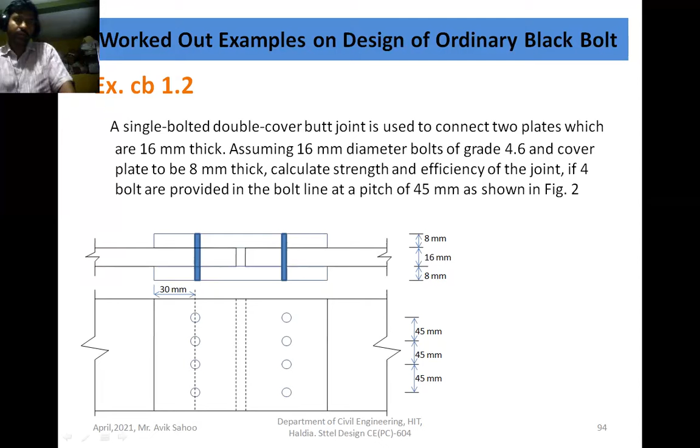A single bolted double cover butt joint is used to connect two plates which are 16 thick. Butt joints are used when the members are joined end to end. In a butt joint, cover plates are used—here two cover plates are used, having thickness 8. This is a bolted connection, and the bolt specifications are given: the diameter of the bolt is 16, the grade is 4.6.

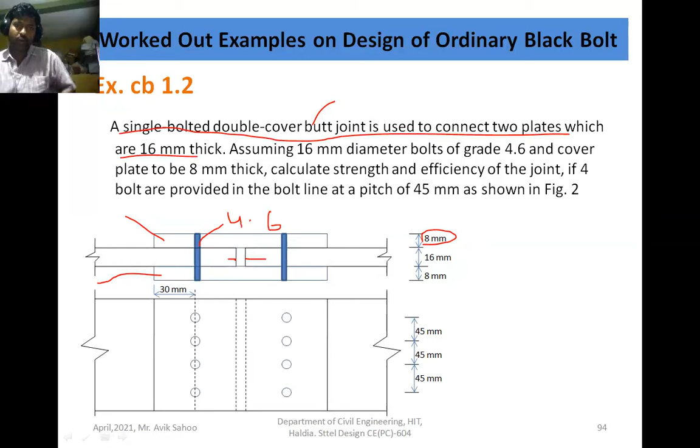If 4 bolts are provided in the bolt line at a pitch of 45, here the 4 bolts are used, and all the bolts are placed at equidistance, so the pitches are equal. The end distance is also given, that is 30. So what you have to find out: you need to find out the strength and efficiency of the joint.

In bolted connection we mainly find out shearing strength and bearing strength, and the minimum is considered as the design strength of the joint. So here the strength you have to calculate, and also you have to find out the efficiency of the joint. Additional calculation is required, meaning you have to find out the tensile capacity of the plate using the gross area and net area.

The bolt will be in double shear because here double cover plates are used to join the members. So that's why the bolt has double shear, because two shear planes are developed—this is one shear plane, this is another shear plane. So you have to find out the double shear strength of the bolt. Due to these shear forces, this member and this member try to slide one over another. So here there are two shear planes.

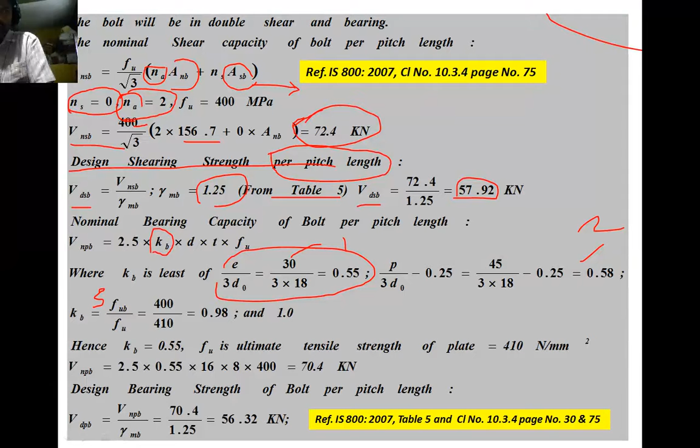We compute kb using the following expression, checking four values and the minimum is provided. This is the first value, second, third - the ratio of ultimate tensile strength of the bolt to ultimate strength of plate - 0.98, and 1. So these are 4 values, and the smaller value is adopted. So kb is 0.55.

Fu is the ultimate tensile strength of plate. This data is given in the problem, so Fu is 410 Newton per millimeter square. Hence, for the nominal bearing capacity of the bolt, we put these values into this expression and get the nominal bearing capacity of the bolt.

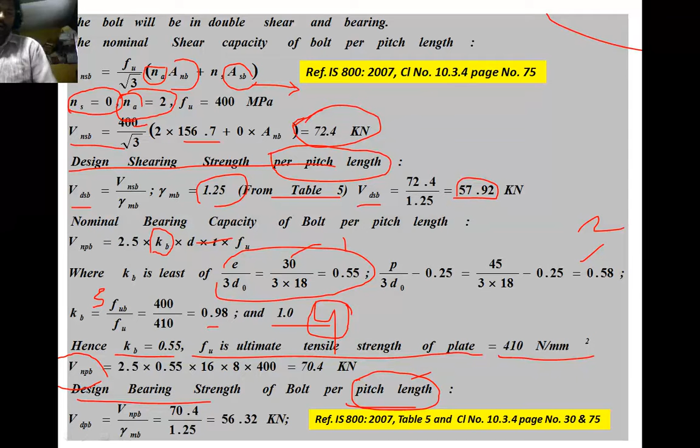Next we find the design bearing strength of bolt using the bolt factor of safety, dividing by it to get the design bearing strength of bolt per pitch length. Remember, this is very important: we find the strength per pitch length, not the full width - we consider only pitch length.

Next we find the strength of plate per pitch length - the net design strength. This is calculated using the net area. Using the net area we find the design tensile strength of the plate, using the formula given in IS 800/2007, clause number 10.3.4, page number 75.

So go to page number 75 and read that clause number. Their equation is given to determine the tensile capacity of the plate. Using that formula we find the capacity of the plate is 63.76 kilonewton.

An is the net area of the plate, because the strength is calculated per pitch length, not full width. Full width is not considered, only the pitch length. That's why P is used here - because in the formula, if I consider the full area of the plate, then P is replaced by B. If I consider full width, P is replaced by B, but since we consider the design strength per pitch length, P is used.

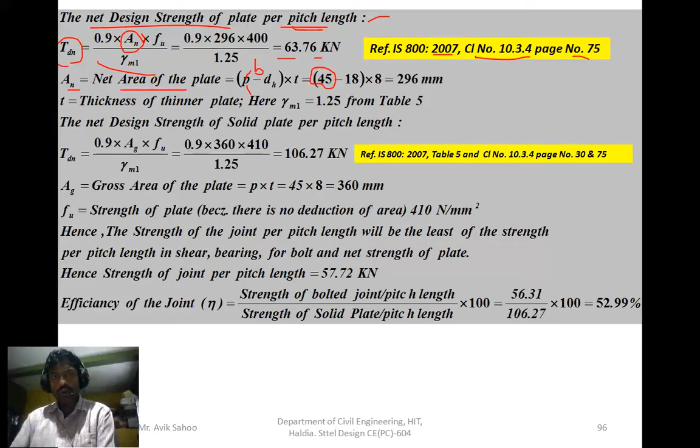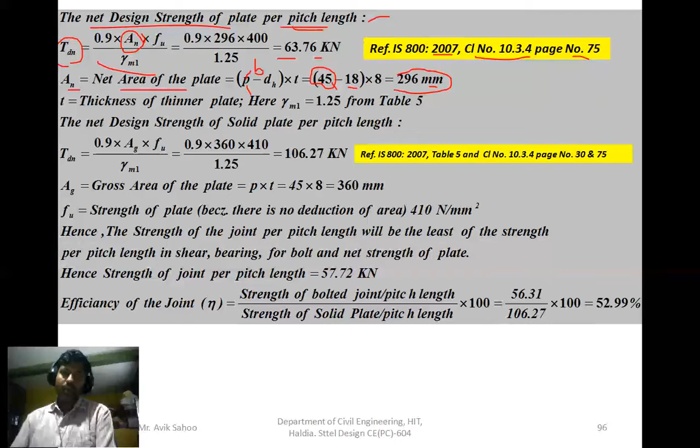So P minus diameter of the hole - in the pitch length, only one hole remains. So 45 is the pitch length, and hole diameter is minus 18 into 8, giving 296 millimeter square. This is not millimeter, so I made a mistake here - the net area of the plate is 296 millimeter square.

And T is the thickness of the thinner plate - here we are using a 16 mm plate and an 8 mm plate, so the thickness of the thinner plate is 8 mm.

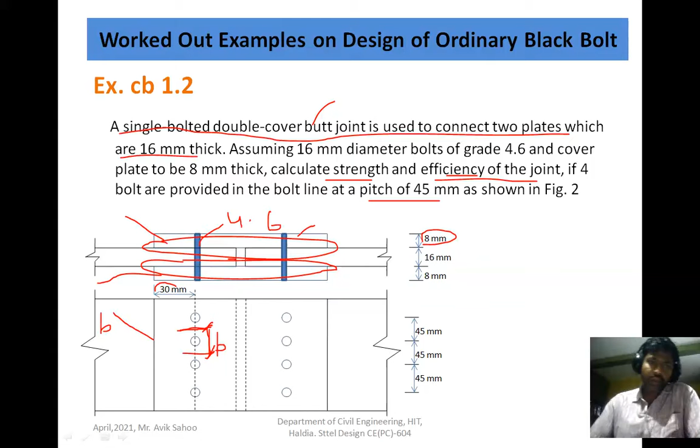At the pitch, we are calculating the strength per pitch length, that's why the pitch distance is taken - only this pitch. If I consider the full width or full area, then we use B, not P. But here the pitch is considered, strength per pitch length, so P is taken. In the pitch distance, one hole remains, so pitch minus hole diameter gives the net area.

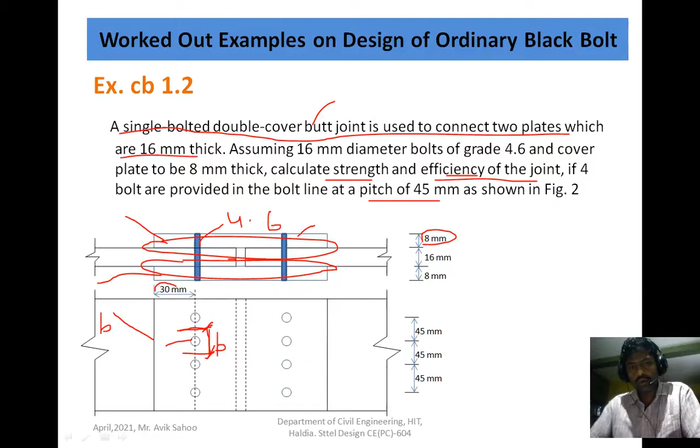Now the gamma M1 is the partial factor of safety for material. This is 1.25. You can check the codal provision.

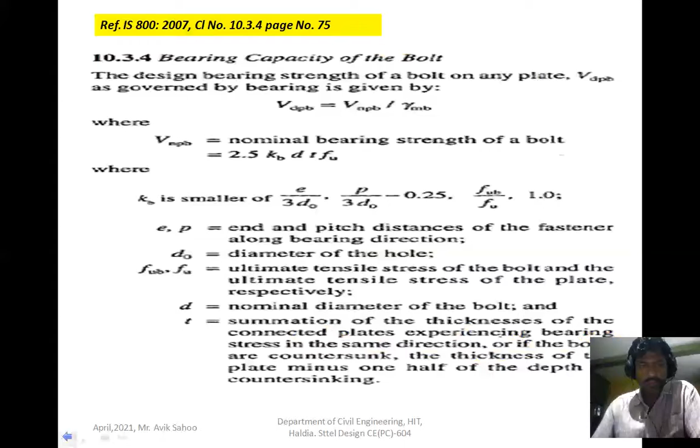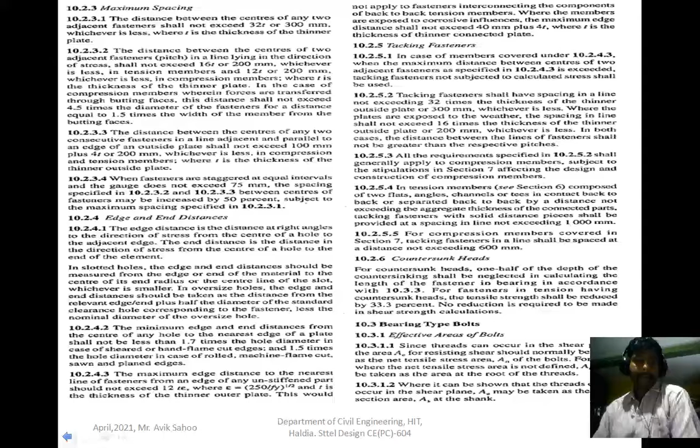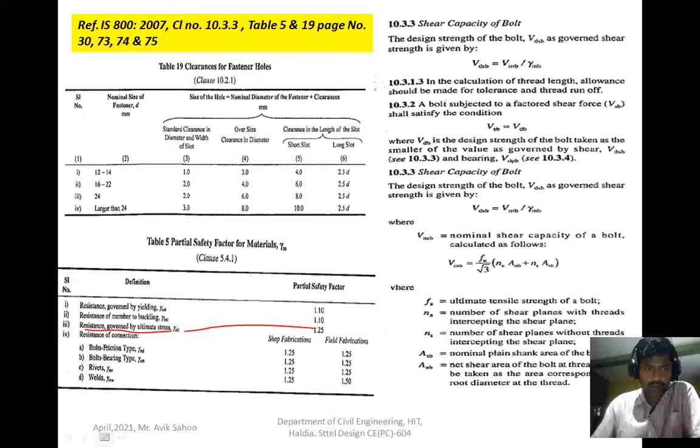You see here the resistance governed by ultimate stress, the value is how much? This is 1.25, so that's why 1.25 is considered, which is given in table 5.

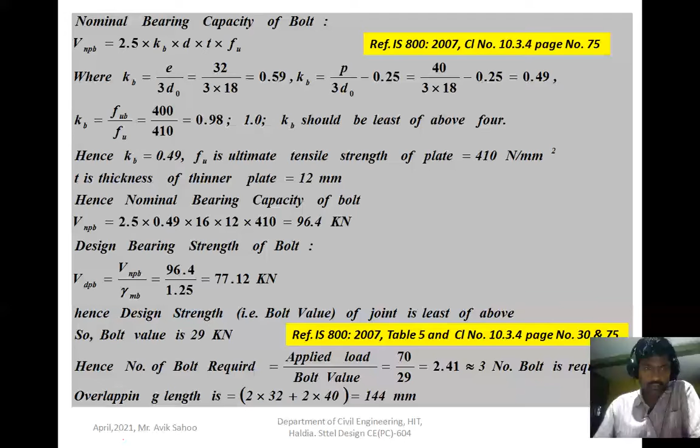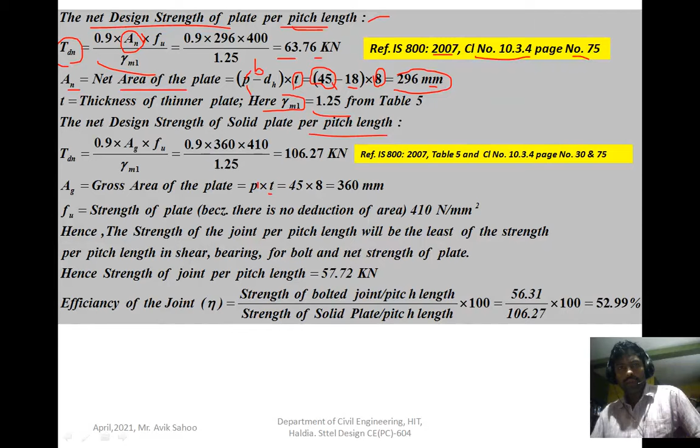Next, to find the efficiency, you have to calculate the design strength of solid plate per pitch length. Here no hole area deductions are made, so you have to consider the full area, per pitch length, so that's pitch into T. Here you see the diameter of hole is subtracted, but as we consider the full plate, the gross area, the diameter of hole is not subtracted. This is the strength of plate without hole.

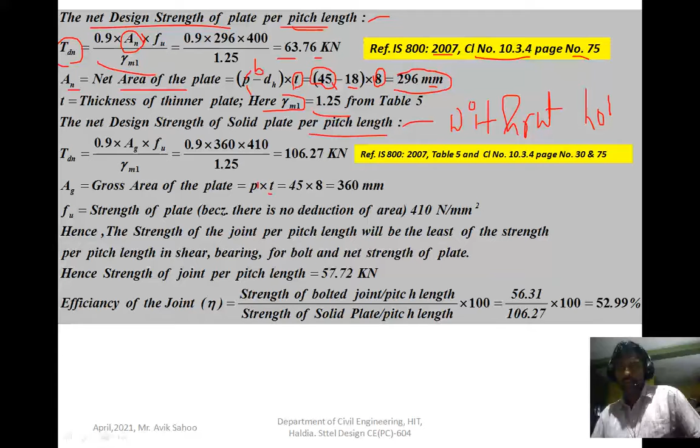The strength of plate without hole is the actual strength of the plate. So the full area is considered, not the hole area. Without hole, that's why it's pitch into thickness of plate, to get the gross area of the plate.

If I want to find the design strength of solid plate for full width, then P is replaced by B. So that's why 45 into 8, we get 360 mm.

Why is FU 410 considered? Because there is no reduction of area, so the strength of plate is considered, whereas here we have considered the minimum strength. As the bolts are inserted to join the members, between the bolt strength and plate strength, the minimum one has to be considered. So minimum is 400. So 400 and 410 - 410 is for plate, 400 for bolt.

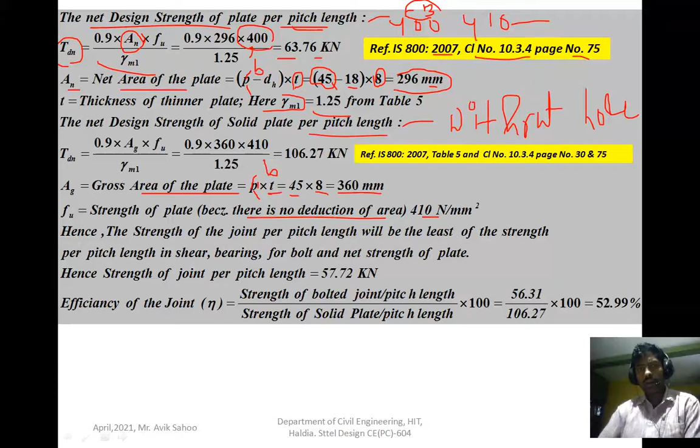So which one is the minimum? For bolt it is minimum. When we consider the plate without hole, the bolts are not used, so only the plate strength is considered, which is equal to 410 Newton per millimeter square.

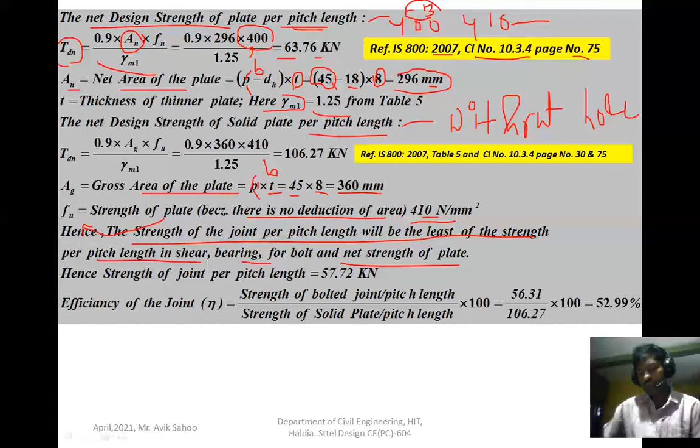Hence the strength of the joint per pitch length will be the minimum of the strength per pitch length in shear, bearing for bolt, and net tensile strength of the plate. So the minimum has to be taken between the three: shearing strength, bearing strength, and tensile strength of the plate. So minimum means shear gives the minimum value, that's why 57.72 is considered.

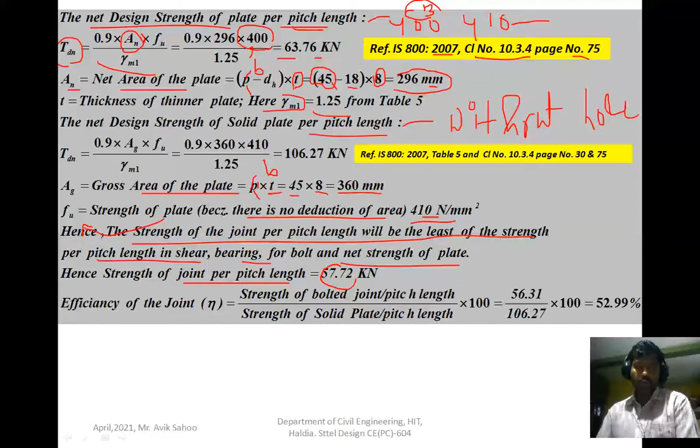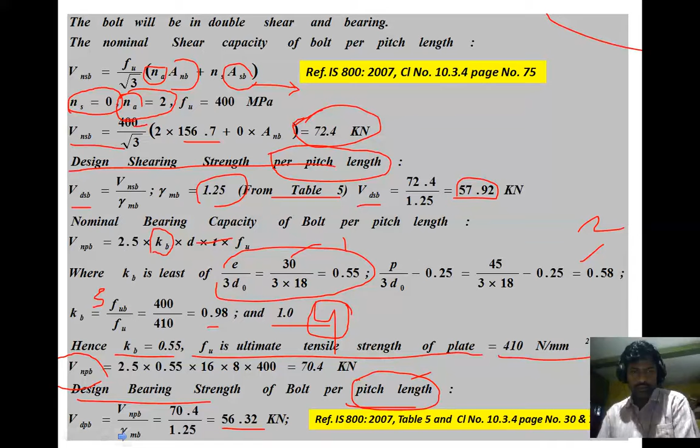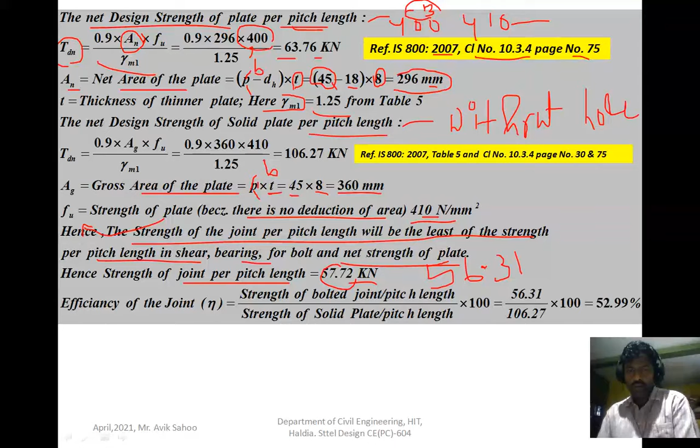I did a mistake here - this is not 57.72, this is 56.31. Why 56.31? Because the bearing gives the minimum value. So here I did a mistake, this is wrong. It's 56.31 because bearing gives the minimum value.

Now the efficiency of the joint - this will be the strength of the joint, the minimum of the three. Now the efficiency of the joint equals strength of bolted joint per pitch length divided by strength of solid plate per pitch length.

So I divide 56.31 by 106.27, this value being the strength of solid plate. Now we see that the efficiency is 52.99%. So from this value, what we understand is this is 52.99% efficient because of the presence of hole.

The efficiency of the joint is reduced. So the efficiency of the joint is 52.99% because when you make the hole, the strength is reduced. So you see that we only get an efficiency of 52.99%.

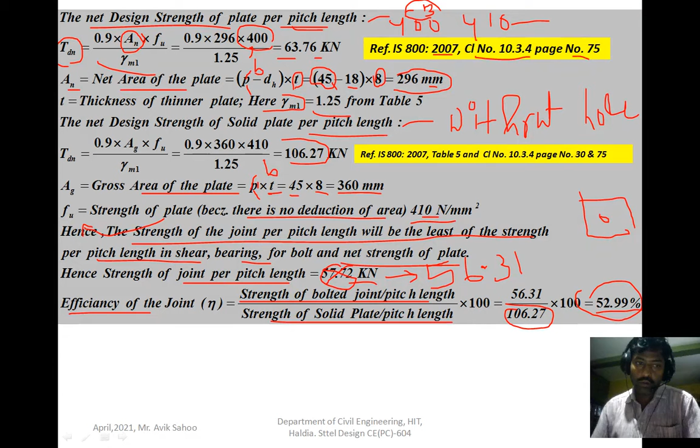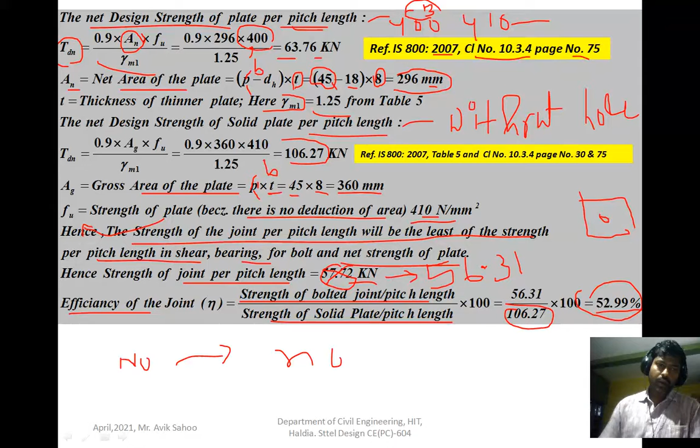And this point is very important: if welding is done, then we get the maximum efficiency, because in welding there is no hole. So the joint may be more efficient in case of welding, because there is no deduction of area of plate. So here I end my lecture.